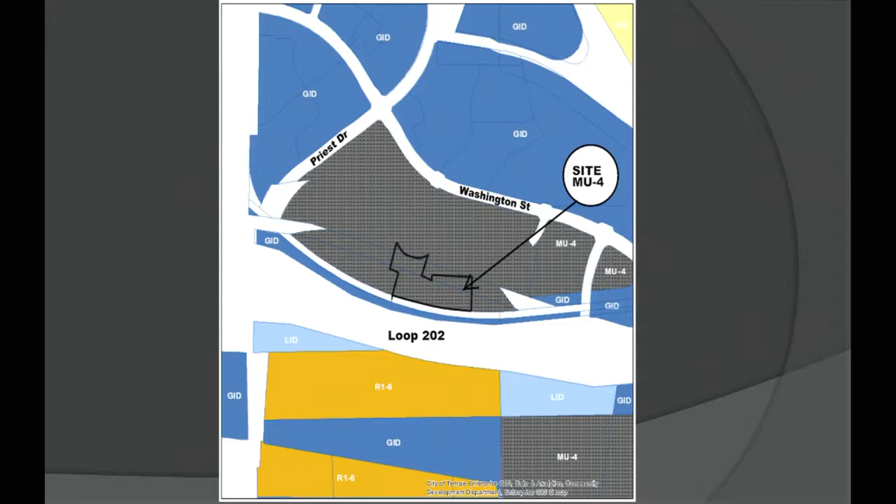The next item on our agenda is the Grand at Papago Park Center. Good evening, Chair and Commissioners. This development plan review request is for the property located at 1027 West Roosevelt Way. The site is part of the Grand at Papago Park Center Master Plan Development that was initially approved by Council in 2013. The property is zoned MU4 and has a PAD overlay.

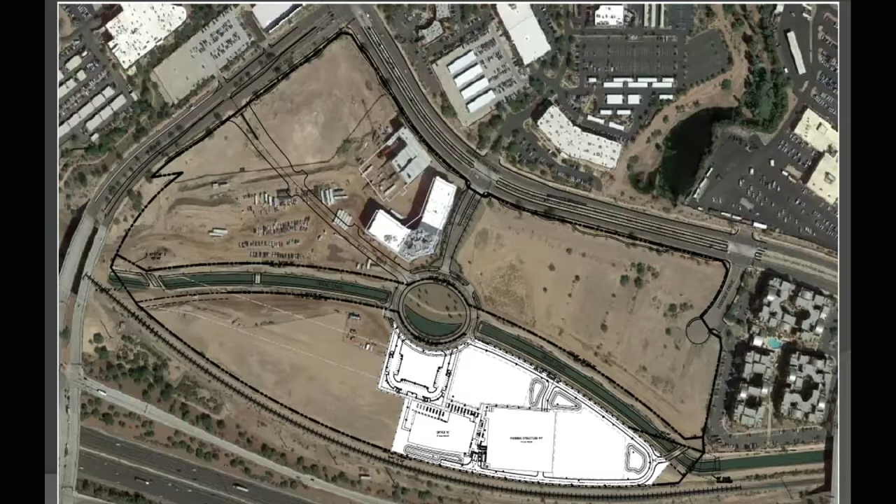The property is currently vacant and will consist of a lease area of approximately 8.34 acres of the entire 67-acre master plan. The development will consist of a 9-story office building labeled as Office O on this plan and a 7-level parking garage. This plan also shows a future office building to the north of Building O and a parking garage addition to the east of the current request.

Vehicular access is provided off of the private street, which is named Roosevelt Way, and that cuts across the project between Washington and the Loop 202 freeway. Additional access would come from Parkside Drive to the north, which connects to Washington.

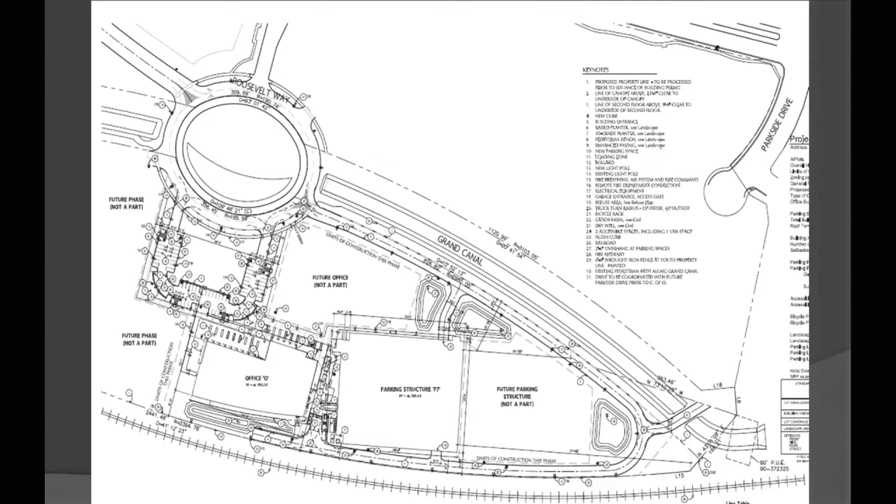On the landscape plan, evergreen elm and southern live oak trees are used at the perimeter of the site, with red pistache at key points within the surface parking lot.

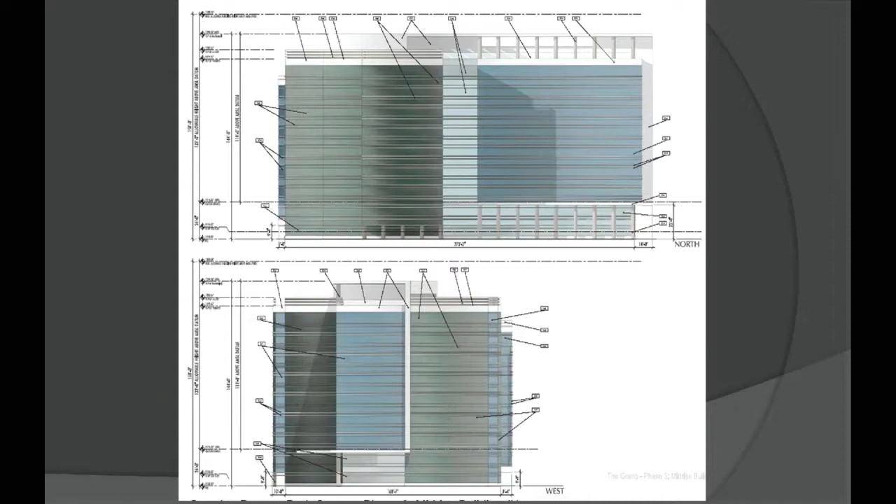The building is constructed of precast concrete with glass and metal panels at the exterior. Proposed glazing is clear as well as gray and blue tinted glass. The primary metal panel color is white, with accenting metal panel colored dark gray and nickel. The parking structure is constructed of precast integral colored concrete with 3/4 inch reveals and metal panel accents to mimic the panels on the office building.

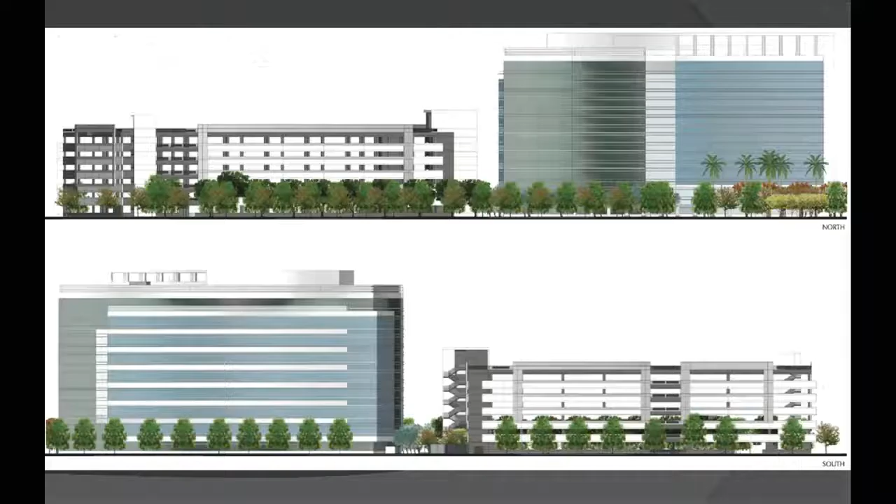At staff's request, the applicant has provided a south elevation and rendering of the garage depicting a future phase 2 expansion. And just to note, any expansion of that garage in the future would require a DPR approval. A neighborhood meeting was not required for this application, and no public input has been received.

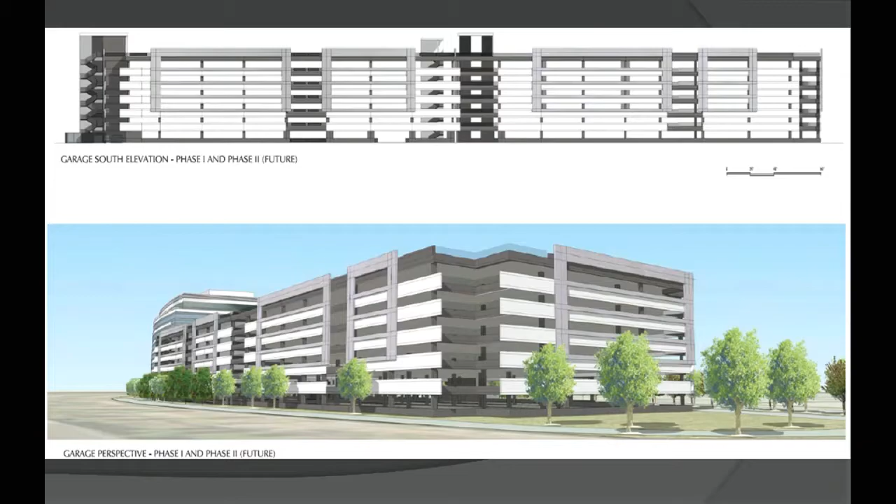With that, I'd be happy to answer any questions. Any questions of staff? Seeing none, I'll ask the applicant to come up.

Chair, members of the commission, for the record, my name is Grady Gammage Jr. My address is 502 South College in Tempe. I'm here tonight on behalf of Lincoln Property, who will be the developer of this project and was the developer of the first phase in the Grand project. From Lincoln are Dave Crumley and Doug Clockey. Also here is Mitch Rosen from SRP Papago Park Center. The building has already been through the SRP Papago Park Center review process, which is extensive with regard to this. Also here is Ms. Vaz from my office.

And finally, Bucky and Adam Valenti from Davis, the designers. I'm going to let Adam do most of the talking. This is the first of the mid-rise buildings at the Grand. There are planned to be 4 mid-rise buildings of 9 stories each. It's a little bit of a change from the original, which was 5 buildings of 10 stories each, but it's the same amount of square footage. What's happened as the market has developed here, it is asking for bigger floor plates for tech and financial type users. This is not like the downtown area where smaller floor plates for smaller users is perhaps more appropriate. This is a 360,000 square foot building and a parking garage with just under 1,500 cars in it.

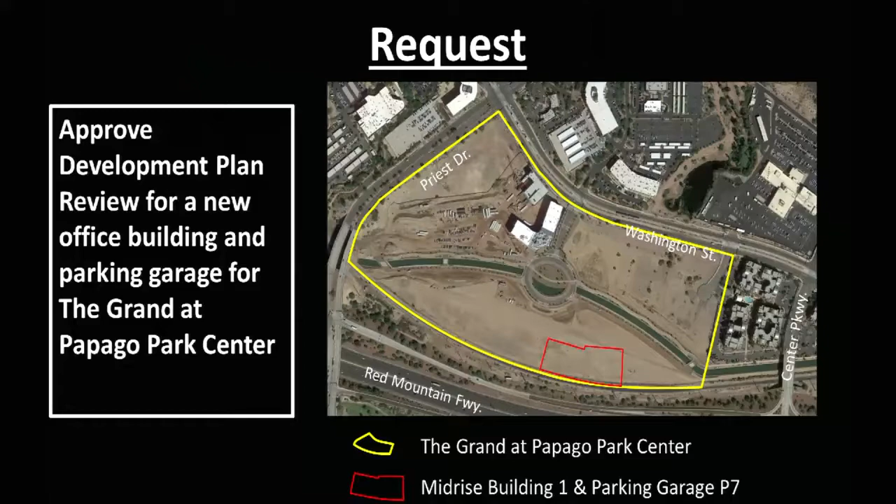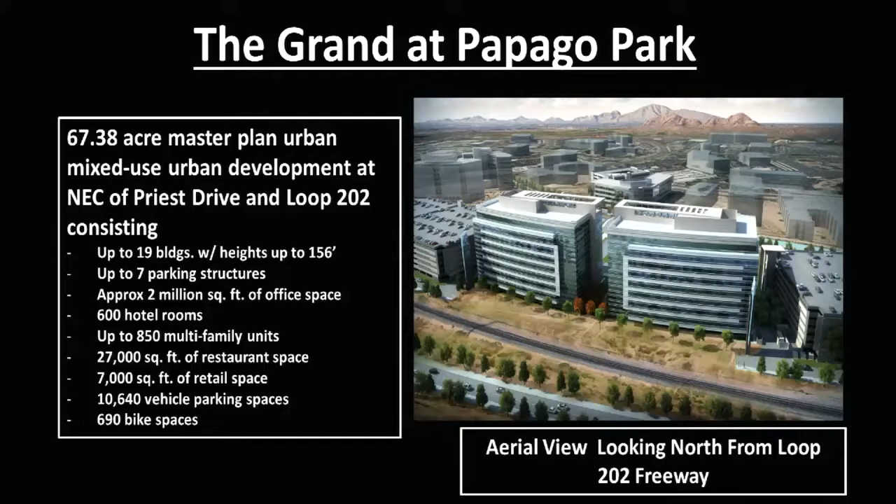This is a good idea of what it's going to look like. We can come back to this a little bit later, but you can see in this view how we're trying to pick up on some of the geometry and the curve of the building facing the freeway. There's another, that's our corner, the southeast corner of the site. That's where we'll be. And here's the kind of full build out of this portion of the site.

As Grady mentioned, originally we had 5 buildings. Now we're going with 4 buildings to, number one, increase the floor plate size, but also to provide a little bit more room between the buildings. So less buildings, a little bit more room, a little more open space.

The overall site design is based around this courtyard, which is located next to the main kind of amenity of the overall development, which is that round oval waterfall place along the canal. The courtyard is meant to act as kind of a common feature for all the pedestrian and building entries. It's also going to function to provide a space for events, so if you want to do like a 5K run or a farmer's market or hopefully concerts, things like that, that can be out there on that lawn and be kind of an amenity for all the buildings.

This is what the full build out will be for phase 1. So you see our office building, there's the courtyard coming off of the oval, and the phase 1 parking garage. This shows the landscape, and again, we've introduced those pistache trees, so you get a real pop of color. That'll be a great kind of entry feature for all 4 buildings when they're all there, but definitely for phase 1.

This is overall the plan. There's going to be residential in here too, right? They're going to be on the other side of the canal. Correct.

I have to presume that once they live there, they're going to be wanting to walk or bike around there. And I like the way the office has the blue tint and gray tint windows. I think that's a good idea.

But then the parking structure seems so minimal and stark compared to that. If people are going to be living there, I could see if it was just office space and people didn't care, but if people are going to be circulating around that structure and seeing it from the freeway, it doesn't seem like you took the same care to blend the two together, or to cover the idea that it's a parking structure.

It looks pretty stark. And I don't know about those little things that you added on, those panels. Or are they panels? Yes.

Actually, if I could respond with the site plan first. Both parking garages are located kind of towards the perimeter, and they key into the site a little so that as far as the residential views are concerned, or if you're moving along the canal, you're always going to see more of a corner versus that flat facade that you might get on the other side.

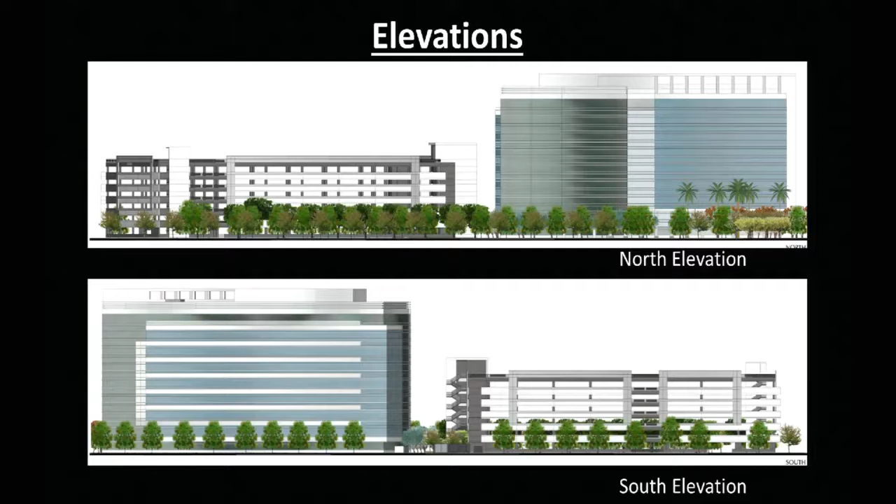The panel to me looks more purple than blue. Is it going to be more blue to blend with the tinted windows, or? Actually, that's the nickel, that's the same metal panel as is on the office building. We do have a perspective view.

Again, we didn't want it to compete, we wanted it to be a different thing. Also, as far as the 7 stories goes, both intersections that we're between are about 20 feet higher than where we are, so you have on and off ramps coming down. So as far as views from the freeway go, you're really going to be limited until you're right in front of it, parallel to it.

Oh, okay, so you're only going to see maybe the top colorated portion. Yeah, so that's why we brought the metal frame in there and we broke the overall horizontal line of that top floor, again to give it a little bit of movement.

Thank you, Commissioner Summers, comment? Yet another question on the parking, sorry.

I see, yes, this is a big parking garage, but it's also not 7 per 1,000. So I'd be interested to hear, if you're in an office environment and there's the capacity to put in 7 parking spaces per 1,000 square feet, you do it. It's great to see something that doesn't do that. I'm just curious what you're finding in the market that's leading you to be at about 4, looks like.

So 7 per 1,000 is going to be maybe more of a call center type or customer service oriented building, where you're going to get a lot more people per square foot on your office floors. This is more market driven, a kind of Class A premium building, so the parking demand is going to be a little bit less than that 7 per 1,000.

This is more like 5, high 4s to 5 per 1,000, and that's what's been designed for all of these through there. It may well be as this proceeds and we see subsequent phases, those garages are going to get even smaller yet. I think that's sort of the hope everyone has, that as we transition the way we move around the city, garages are going to get smaller.

Commissioner Brown? Thank you. So just to clarify, this perspective on the screen now is about half of the final garage, correct?

Correct. So I kind of agree with what Commissioner Amorosi said, that it's a lot of long wall. I'm not sure if there's any way you would want to take a bay near the middle and do a notch. I'm not sure how that would break down a little bit, but it's just a lot of concrete.

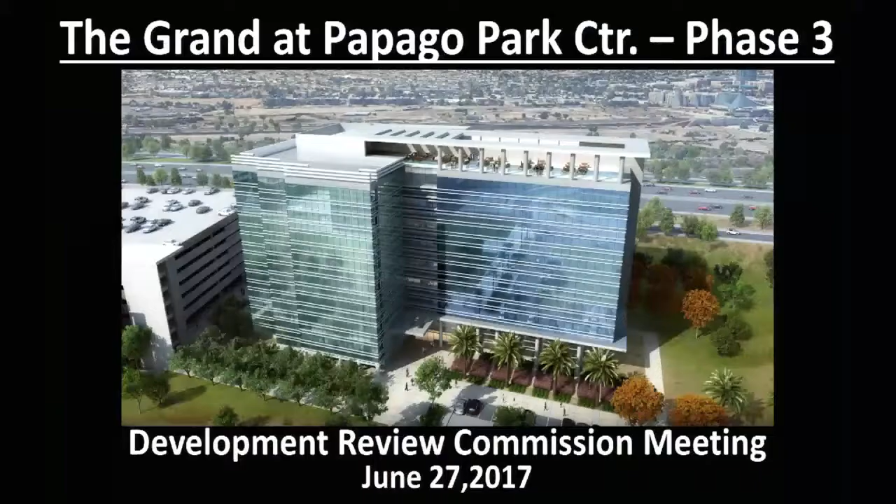I'm also assuming that based on the overall site plan, your plan is to take the same 2 buildings, or 2 plus a garage, and perhaps flip them when you do building Z and whatever's that way. Yeah, it'll be a symmetrical site plan on those sides, yes. Okay, well, that saves time on design later.

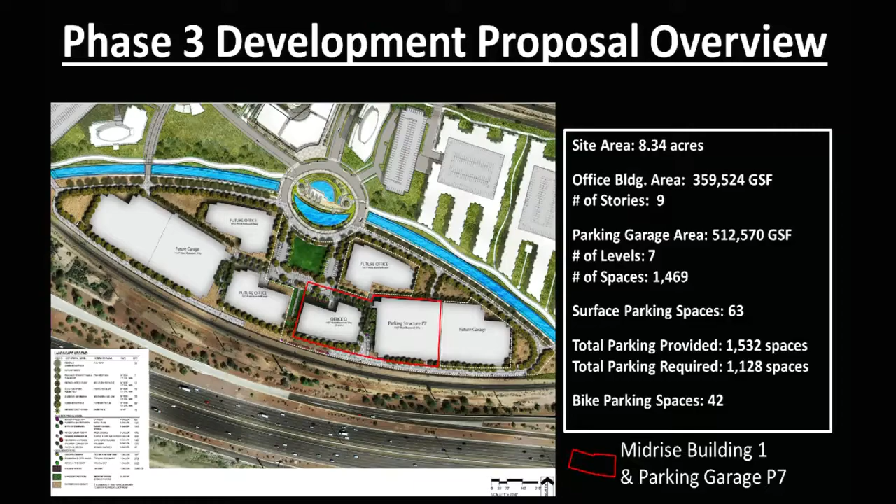So then the next thing I thought of is the fire lane on the south side. There's a hammerhead in front of the office building itself, I assume, to get the right proximity, and it's almost a loop, but then it looks like there's dirt. Will there be some pavement so bicyclists and strollers at lunch can circulate the whole site? You know what I'm saying? There's a path, which I assume is a

good way to circulate. And then it ends right there. It ends abruptly halfway across the O building. The pedestrian circulation, bike circulation, all that's kind of being kept along the canal. And you can certainly loop along the site there. So we're not really encouraging pedestrians and bicyclists to circulate along the freeway.

There is also a heavy rail train track that goes along there, so maybe not as nice as the canal and all the effort put into that. The trains come by once or twice an hour, maybe, but the cars on the street are pretty heavy. I agree that the central ellipse with the water is going to be a nice feature if it isn't already, but I thought maybe doing the circle, complete the circle.

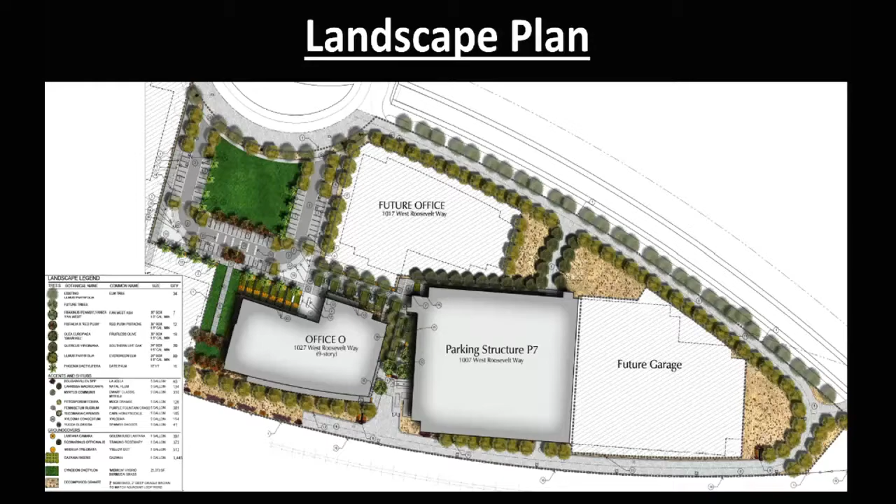I guess that's... well, it's also part of the overall regional bike pathway system and the park system, so the parks ultimately link up to one another. I think it's more of a linear park, so the public's welcome to come by and enjoy that park. Absolutely. Great. Yeah, because the Tempe bike community likes to go places on Tuesday nights.

One last question. The project over here, State Farm, has a few cafes at the ground floor, which I've actually used at lunch. It is kind of nice. I don't see any indication. Would the land use permit or the landlord permit cafes on the first floor, or is it going to be office from head to toe?

I'm not sure, I think if that was an option.

Madam Chairman, members of the board, for the record, my name is Manjula Voss.

Just to answer the original PAD, there will be a coffee shop at the bottom, and there's also retail. I don't know if you remember the original PAD, but there will also be a retail cluster within the mixed-use development that will have other restaurants.

I mean, I'm just thinking about lunchtime. It's good to get out. Us office workers need to get out when the weather's not so hot. Yeah, there's a coffee shop permitted at the bottom. Landlord will permit that. A little sandwich shop. Then across the street there's a Starbucks, and I think there's a Greek place, and there used to be a Mexican food place.

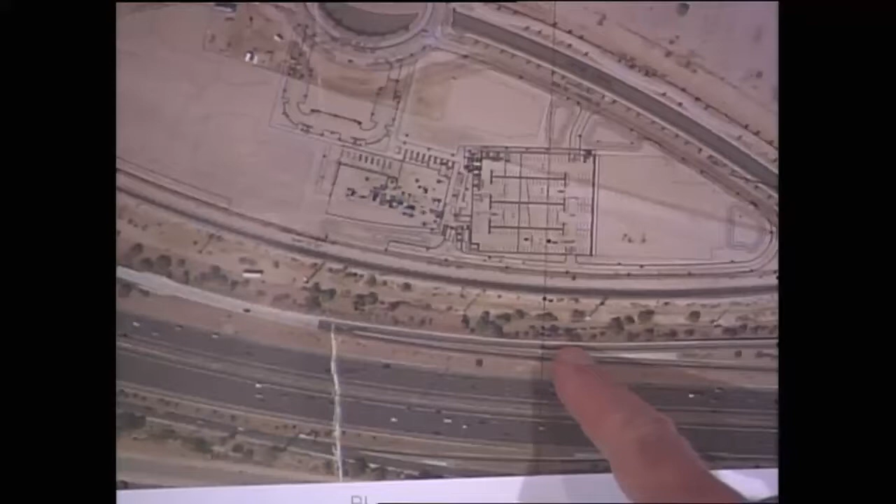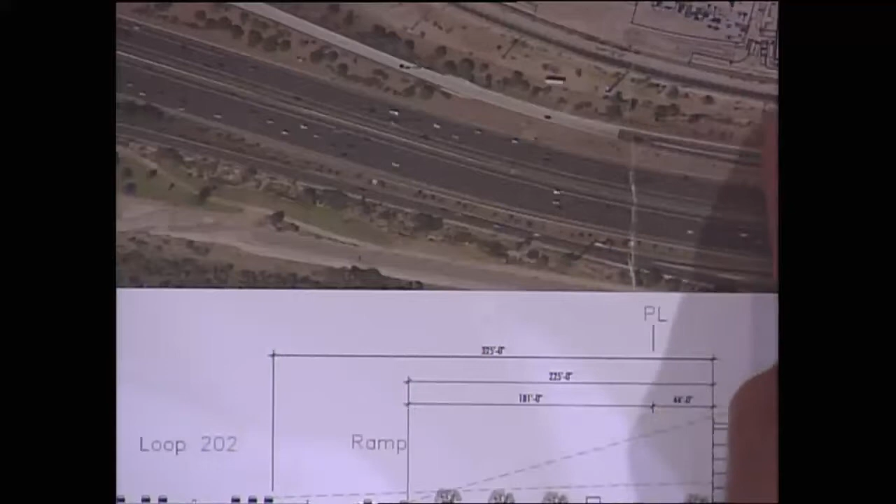So this is a section cut along here, right at the gore point of the on-ramp. The finished floor elevation of both the garage and the office building is at 1150, so that's the 50 you see here, I'm calling that plus zero. Here's our property line. Train tracks are also at plus zero. I've shown trees, these are about 18 feet tall, in the area between the train tracks and the freeway. Some of them look good, some are a little scrubby.

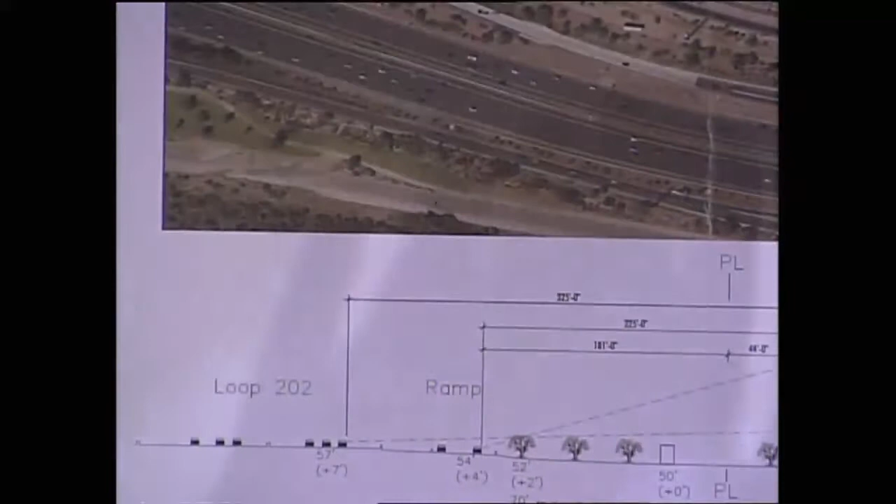The on-ramp is at 54, so it's plus 4 above our finished floor. The freeway, Loop 202, is at plus 7 above our finished floor. Keep in mind that both intersections are at 70, so they're 20 feet above our finished floor, and the ramps both come down. So until you get into this middle area, you're not really going to see much.

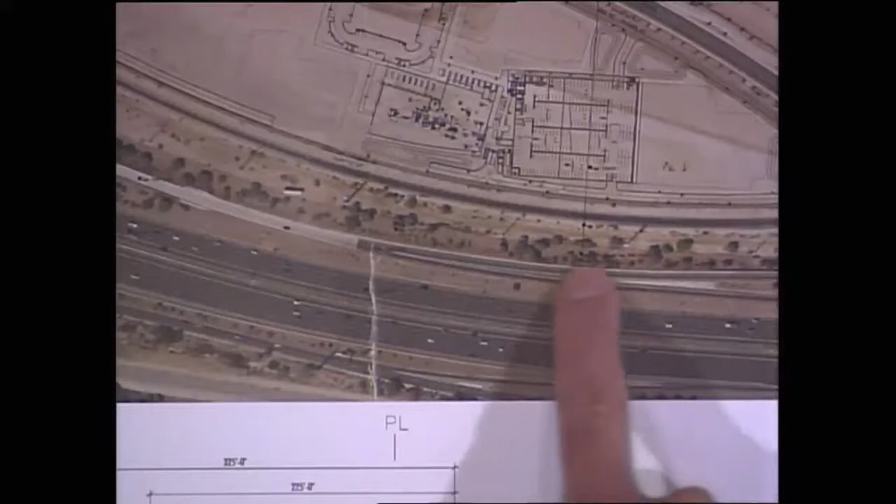From the on-ramp, I've shown the sight line from a car driving there, going through the top of the trees. I understand this isn't a full wall of trees along the freeway, but it is pretty well landscaped. You can see in the aerial, a ton of trees through there. From even further out on the freeway, you actually won't see much of that garage at all through the trees from the on-ramp.

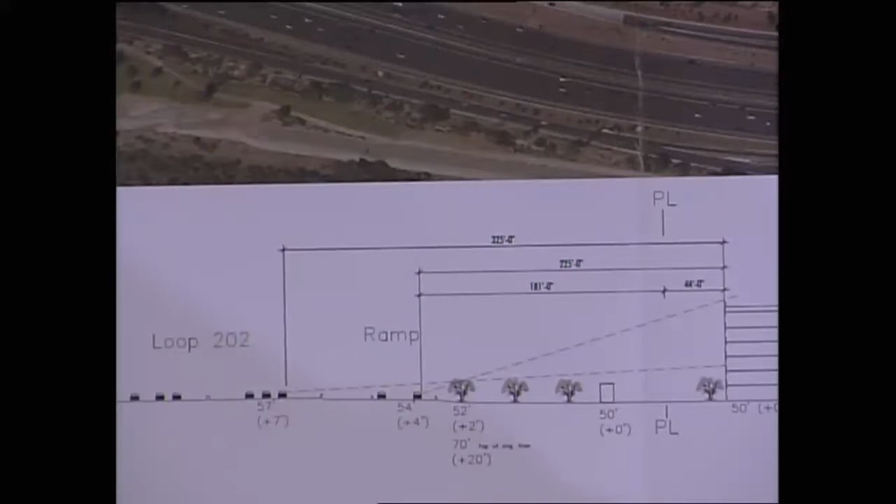From the 202, you're a little further away. You're going to see the garage starting at maybe the 3rd floor, and that's with all the landscape that's in there today. If you drove down there, we also have a ring of trees around the perimeter of the garage, so those first 2 floors are going to be completely screened by trees, and then the building will be above it. You may see this again when we come back through.

And I've been on this ramp almost daily, and when you're doing 70, you don't see anything. Hopefully you're not watching anything that's not right in front of you.

Other comments? Commissioner Lloyd: Thank you. I just wanted to piggyback on what Commissioner Brown mentioned in the bigger picture. The overall plan is for 2 million square feet of office, 850 dwelling units, a hospitality component, and a 6,000 square foot restaurant space. It just seems potentially inadequate to serve that many people, so just keep that in mind as it evolves. But otherwise, it's nice to see another quality Class A office development come to Tempe and hopefully create a bigger employment base for our community. Thank you.

Other comments? Seeing none, I'll entertain a motion.

Madam Chair, I move that we approve case PL 170124, the Grand at Papago Park Center, Phase 3, Mid-Rise Building 1. It's been moved by Vice Chair Lyon and seconded by Commissioner Sumner. All those in favor? Opposed? That passes 6-0, with Commissioner Johnson recusing himself from the hearing and vote.